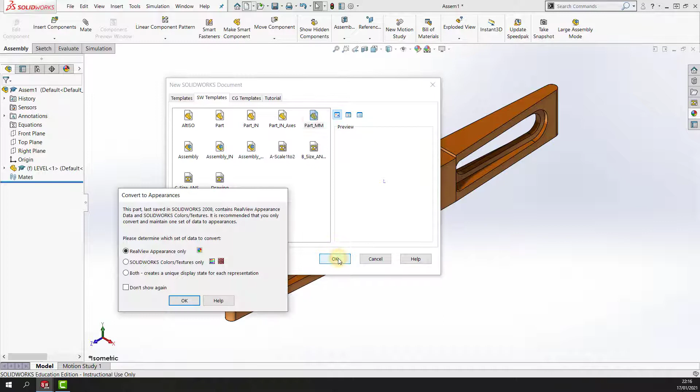Open up the exercise folder in lesson 3 and open the level part in the level assembly folder. We're going to create an assembly with this using the assembly template. I'll insert this level as the base part. Next, we're going to create a new part, and we're going to create the glass cylinder outside the component.

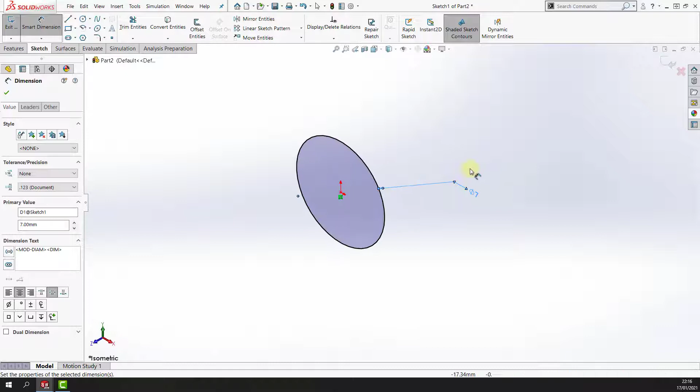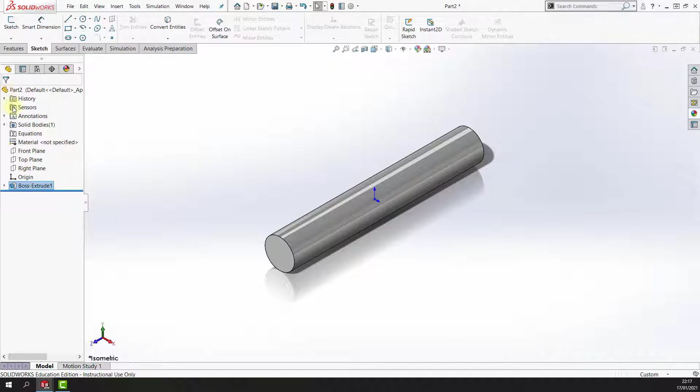I'll make it mid-plane just to help me align it in the assembly. And we're going to give it a material - glass.

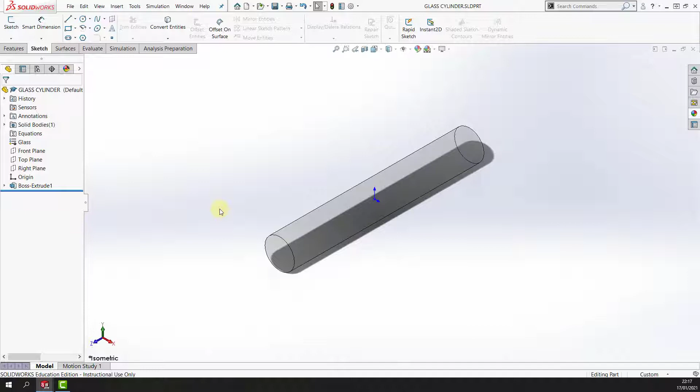I'm going to save that in here as glass cylinder. And then I can pop back to the assembly and insert that in.

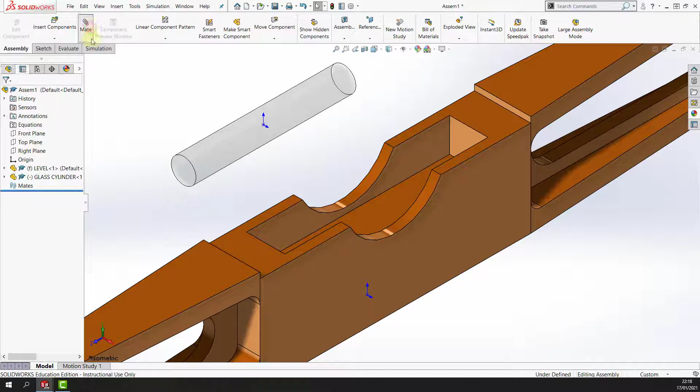We're just going to mate it here now, so I can mate a tangent to that. The design intent is that it's tangent to the bottom, and we'll center it as well.

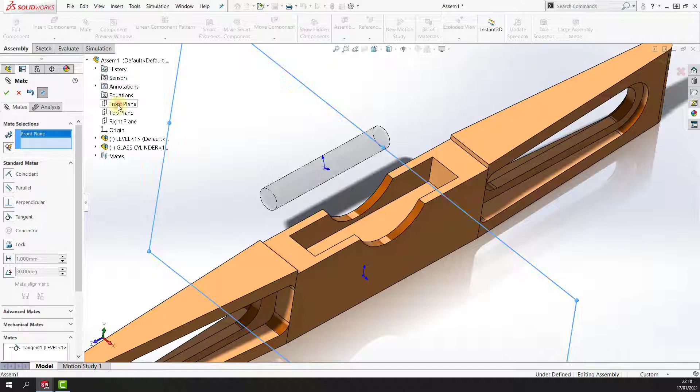I can probably line up the planes there with that, and that plane.

And then we line it up, I suppose. You can see there, because that's placed central, we can line up those planes as well - make it nice and easy for us.

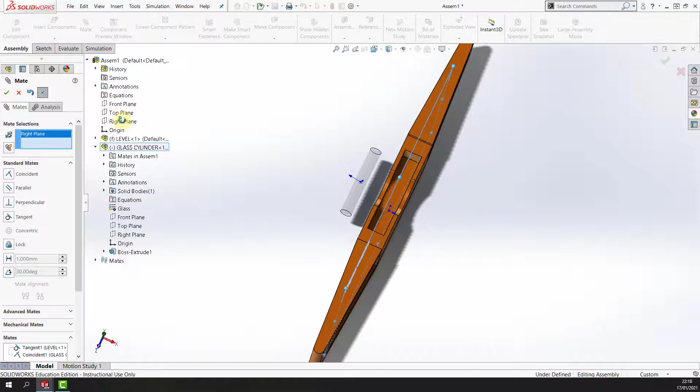Twist around so I can see it properly. And that's not placed in there.

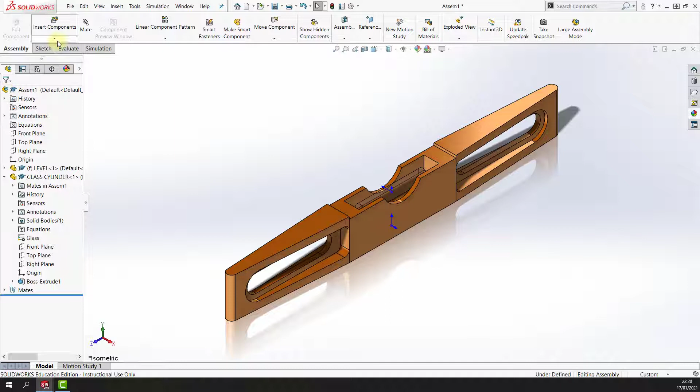Now I'm going to create a new part. I'm going to select that face to create a new part, and I go number 2, and I'll just take a center rectangle.

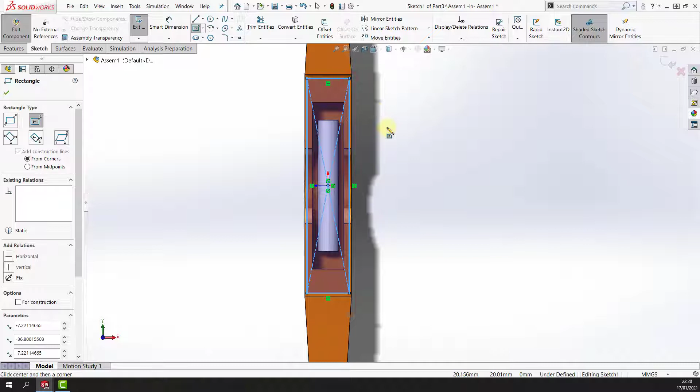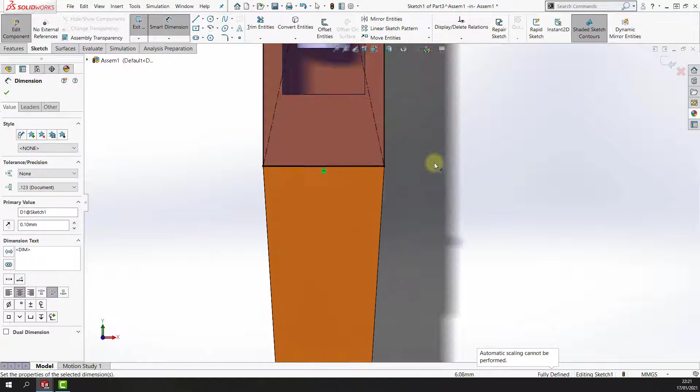The design intent, if you look at it, this is meant to be collinear with that, and then we've got to just throw a dimension on there. There's a little space between that of 0.1, and I'll create the space both ends.

And then we're going to extrude that, and we'll extrude it up to the surface, up to that surface, and click OK.

And then we're going to do a little cutout then on that - just create a little slot.

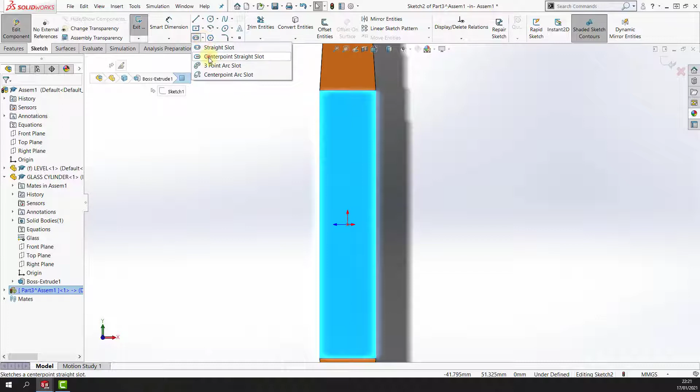You hold down shift, you can get the overall length of that, so that's 45, and that's a radius of 4.

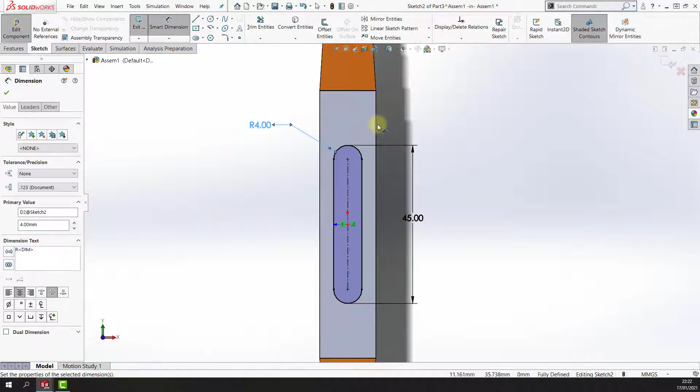And with that straight cut then.

So that's that completed. We're going to do the holes, as I said, we're going to do that as a whole series. So get out of that part.

And I'm going to save the part as an external file. We'll name this top cover, and we're going to save it in the same folder as the assembly.

Oops, forgot to save the assembly. Let's do that first then.

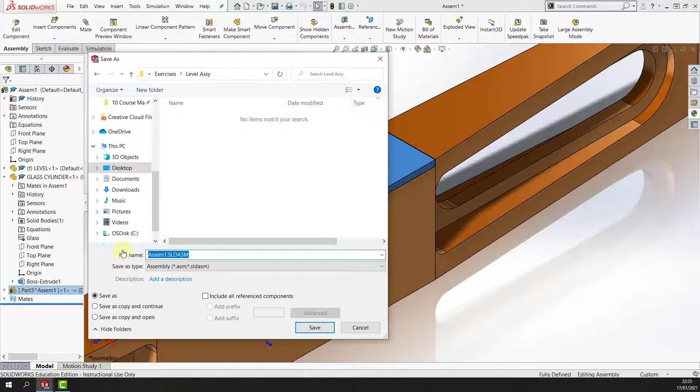I'm going to get them to save it externally again, so it's offering me the chance to save this part again. Do it properly this time - we're going to call this top cover, and save it in the same folder as the assembly.

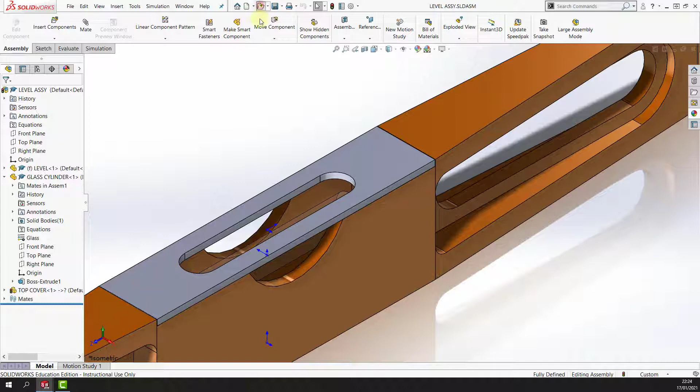And that's saved. If I open up that, you can see top cover is in the same folder as the level assembly, the level, and the glass cylinder.

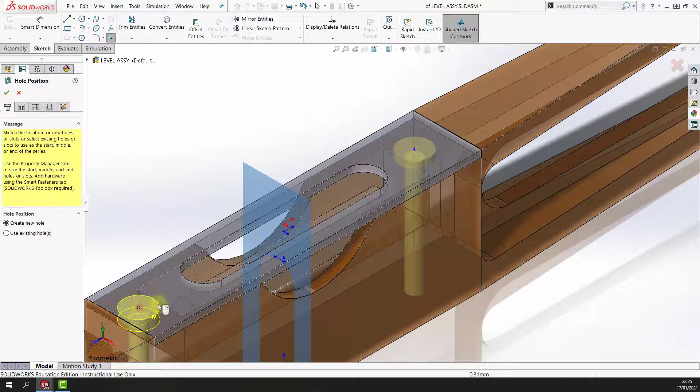So now I'm going to do a little hole series. If I select the face first and then select hole series, and create my parts, locations, just put normal to on that.

And I'm going to make all these - so these 3 points, we can make them vertical, and then the pitch between that is 65.

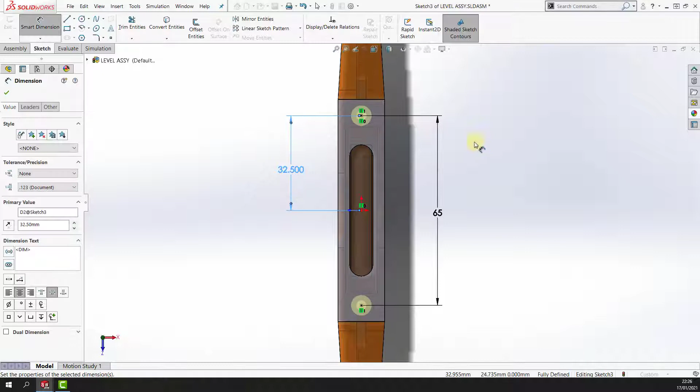And I'll just probably pop a dimension on that to keep it central. And now we can go and select the hole.

So the hole series starts off with a countersunk hole, and it's ANSI Metric and a flathead screw, and it's an M2.

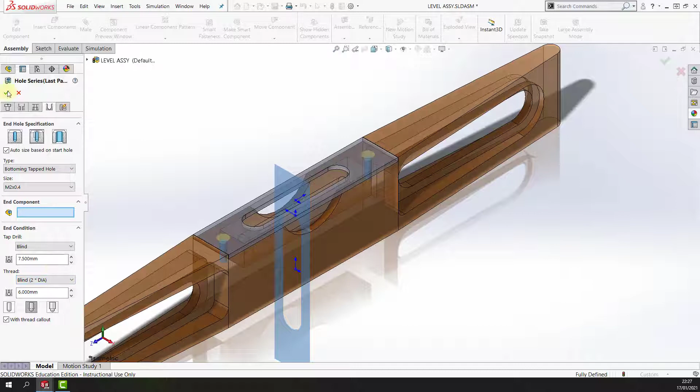And the end then is a straight tap blind hole, and we can accept the default on that, and I'll click OK.

And now we can do the smart fasteners then, and add those in. And then just save that assembly. So that's my assembly complete.

So let's just create an exploded view then of this - exploded step components. So we might just select the auto space on components and we'll select.

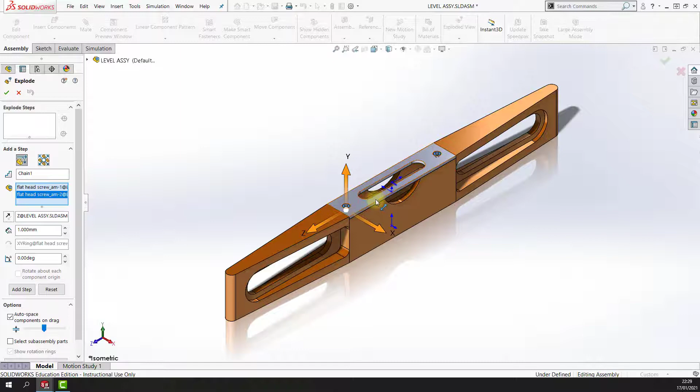And then pick it from here, glass cylinder.

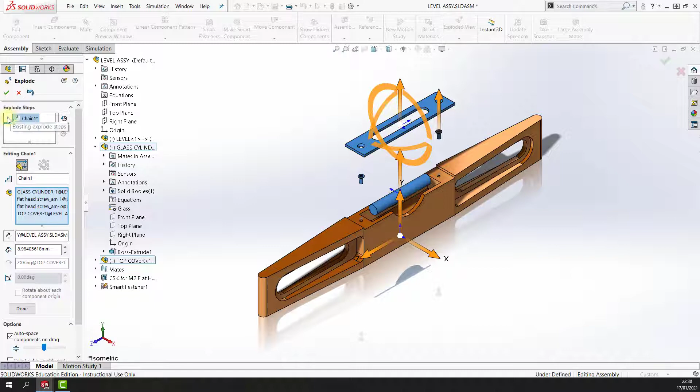And then just make that like so, and have a look at the steps in this.

So maybe back down a bit, and with both of these - both of these up a little.

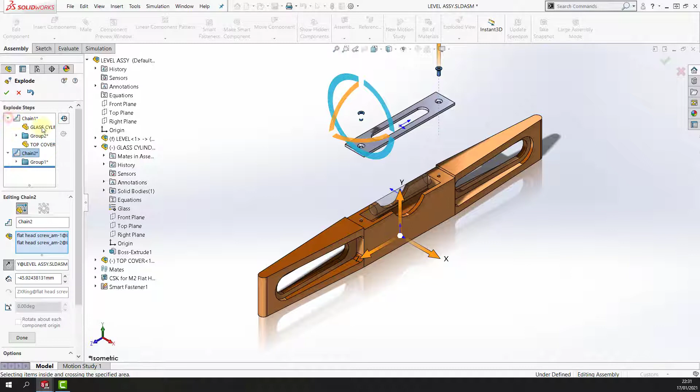And then the glass cylinder - select the glass cylinder, and I just move that up a little bit.

Now if I save that, then if we create a new drawing from that, then...